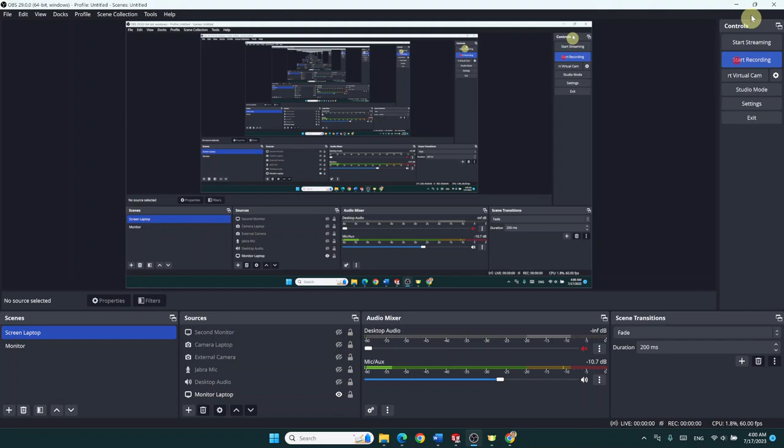So we did one part. Now we want to make the assembly. We don't really need the assembly for the free body diagram, it's just to look nice. So I will show you how to do it.

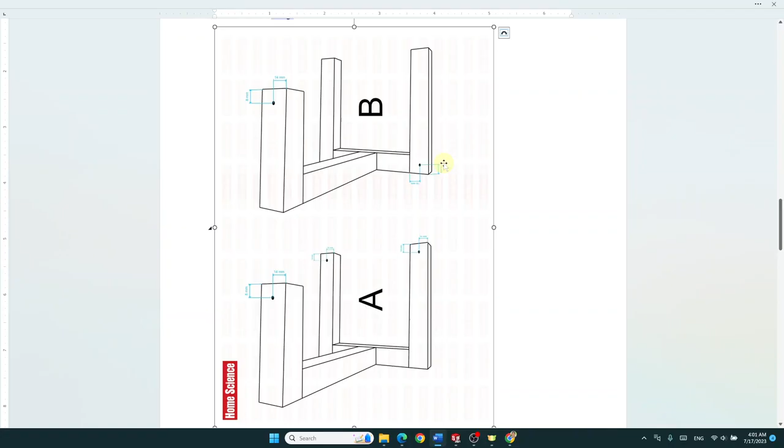Note that the two parts are almost the same. If we go back, that's part B on the top and part A on the bottom. How do I know? The bottom one has the hole near the main post. You see the holes are there, and on the top part the holes are completely at the end of the U shape. So this is the top part and this is the bottom part. The hole on the smaller part that's going in the middle.

That's at 14 and 8 millimeters, both of them. So let's do this hole first, and after that I will save the two parts with two different names and make the two holes. So we have dimensions for the hole. I will make a little hole, let's say a diameter of 2 millimeters. And we have 8 millimeters and 14 millimeters.

So I will use an equation for that. The 14 is easy, it's just the middle, so let's just use the middle for that. This 14 is the middle, and I will just use a distance for the 8 millimeters and the diameter.

So let's go back on Solidworks. Tools, equations. I will use the diameter of the holes, say 2 millimeters, and the distance... I don't need any comment there. This one is distance hole, 8 millimeters from the very end.

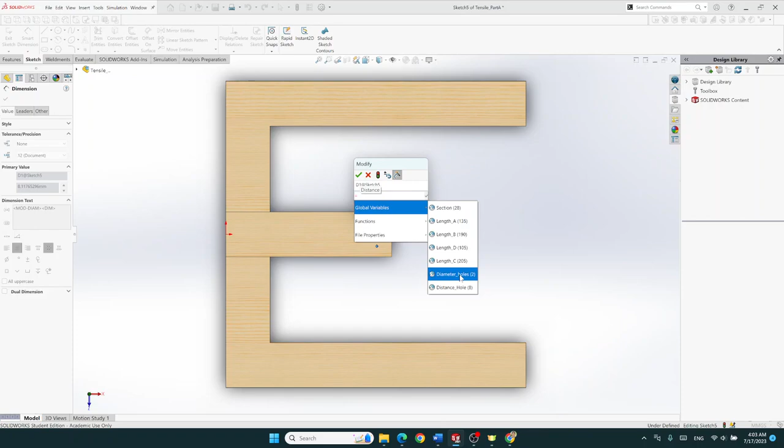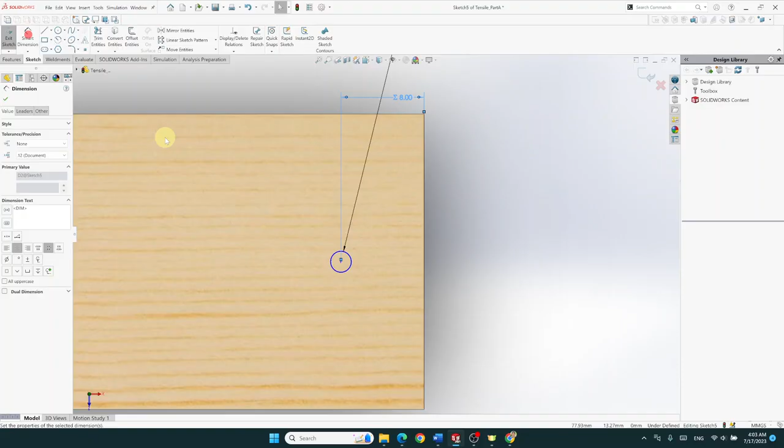There we go. I will use diameter equal diameter of the hole, and I need to add the distance between the center and the side. To zoom in and zoom out, I scroll with my mouse. Equal distance hole, enter. Let me unmark the dimensions. Why can I still move it? I can move up and down, so I need to put the middle one.

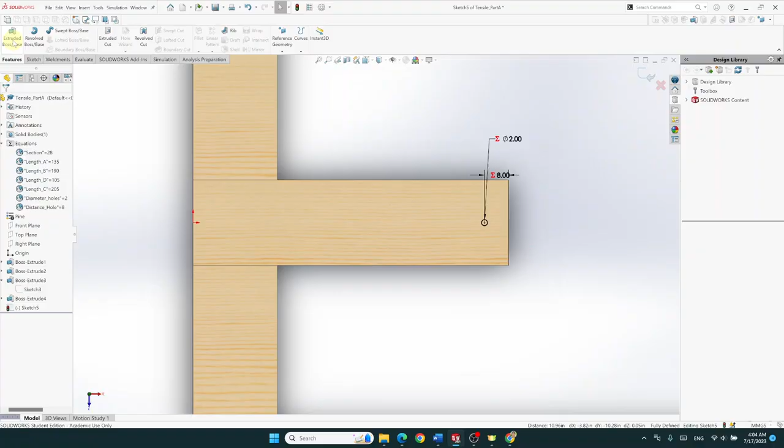So I click on the center of the hole, and let's do this one. Let's see, I can make it horizontal. Here we go, so it's at the center. And for features, instead of extrusions, I will do an extruded cut, and I can make it through all, so that will make a hole all the way through the part.

Here we go. So this is the little part, and now I will save it. So it's saved as Tensile part A, and I will do File, Save As, and call it B. So now I will have two parts, part B and part A. I can check, I have both of them in my folder. Part B is the part with the hole on the bottom.

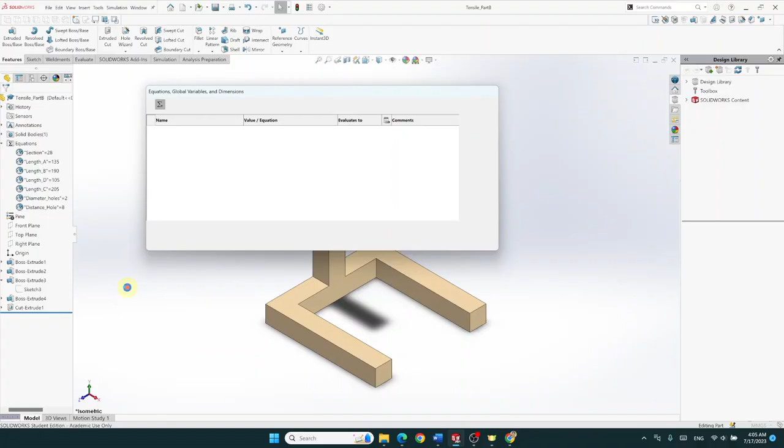If you look there, they are 14, 14 from both sides. Oh, I will need a 14 for this distance. So I will add that in Solidworks. Tools, equations. I will call that distance bottom holes, and this is 14. Here we go.

Okay, and now I click the leg there, sketch, make a hole. I can do two, there's a different way to do that. I can make a symmetry, that doesn't matter. I will add the diameter. If I want, I can just select this one, control this one, and say they are equal, and they will be 2 millimeters right away.

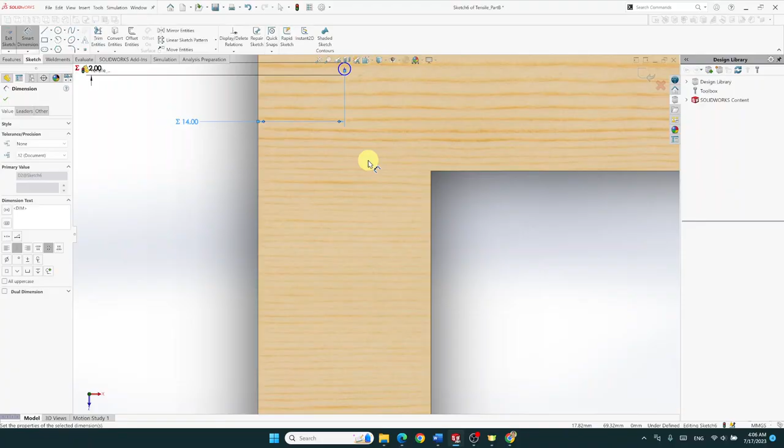Okay, now I need to do this distance, that is my 14. Last distance, like this, this one 14 too. Oh, I think that's maybe a line. Yeah, we have the 14 from the side. Let's do that.

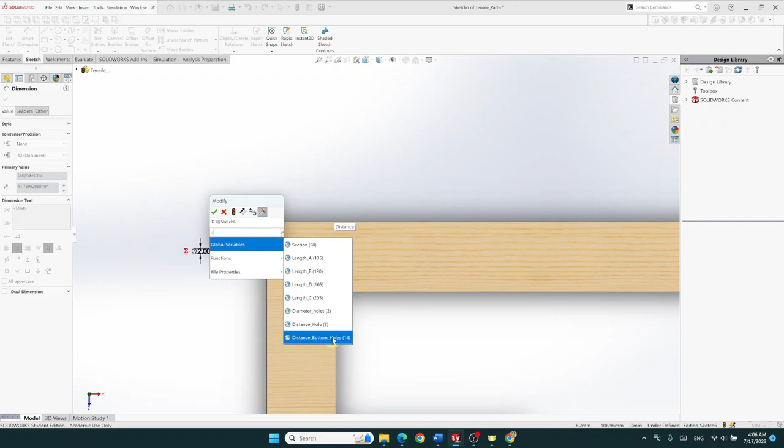Here we go, this one is correct. And this one, let's check how I can move it. I can move it. Okay, I can move it in all directions. So I need to add the 14 on both sides.

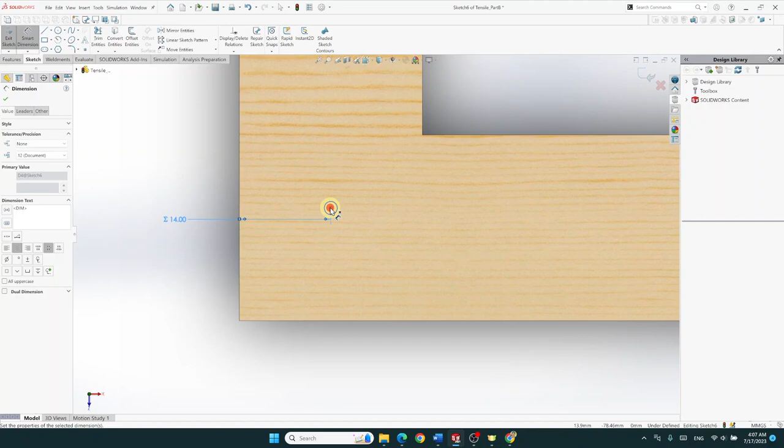Here we go. Features, extrude cut, and I will click through all, and okay. So this is my bottom part.

Let's click save, and let's open the A. That is the top part. So it looks the same except the little hole.

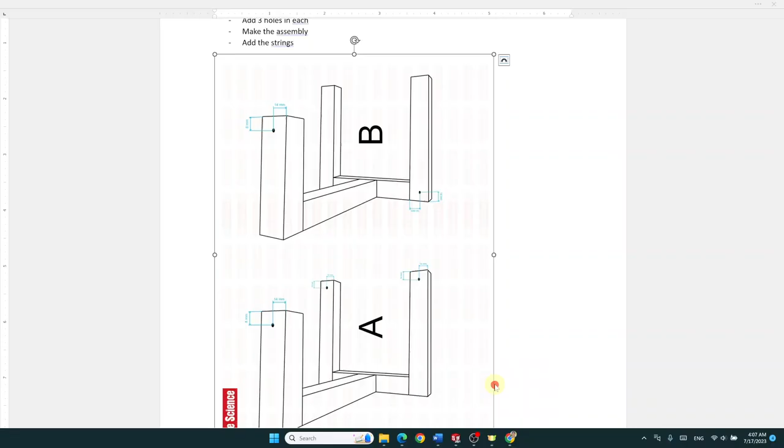And if we come back on that, the top part is 14.14, but from the side. I need to add the 14 because I don't have it on this one. This one is top holes because it's on the top for this part.

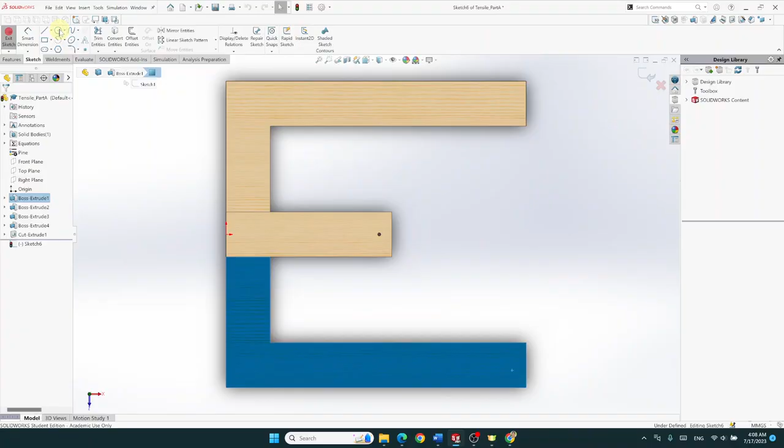Here we go. Yeah, the part will be flipped over. So let me draw the circles on this one. Let's see if I can keep.

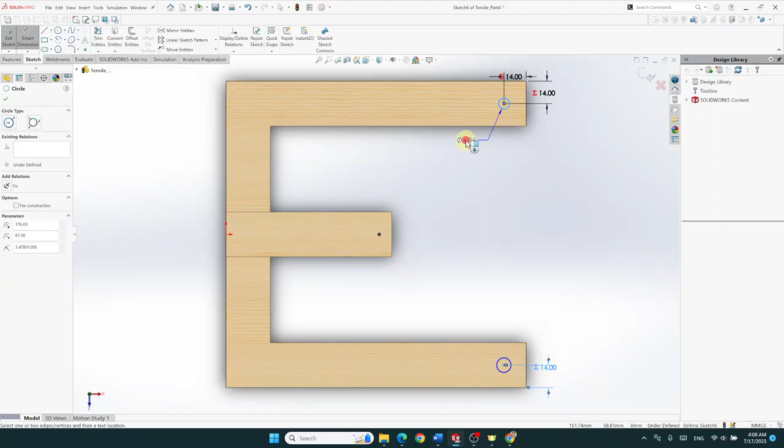Oops, the 14 from the side. I thought I would add the diameter, but let me do this first. Okay, diameter, a small diameter. Oops.

Let's put the diameter also. I can say they are the same, that doesn't matter. Okay, so this one is still blue, so I will add this distance. Even if I put them vertical, it doesn't keep the relation.

Okay, oops, the diameter. Oh, I need to break it. I think delete. How do I delete that? Okay, I think I need to delete and put it back.

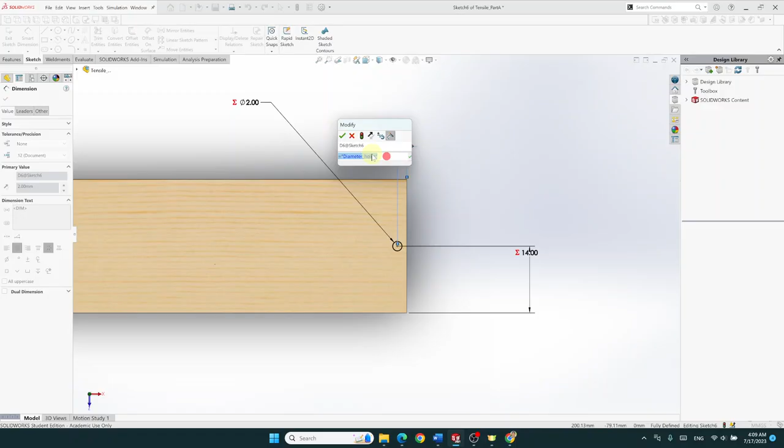I put diameter instead of distance. So I delete it and click again. Oh, no. I'm going too fast. This one. Here we go. I'll remove that.

Features, extrude, and through all. There we go. And save.

Okay. Now I will start to do the assembly. So I will do File, and I will just do one thing that will make it a little bit easier. Let's go back first on the other part. Where's my other part? My other part is there. I am on the Tensile part B. Why? Because this one is the one that is on the bottom. So I want to insert this one first, so that will be the one that is in the right direction.

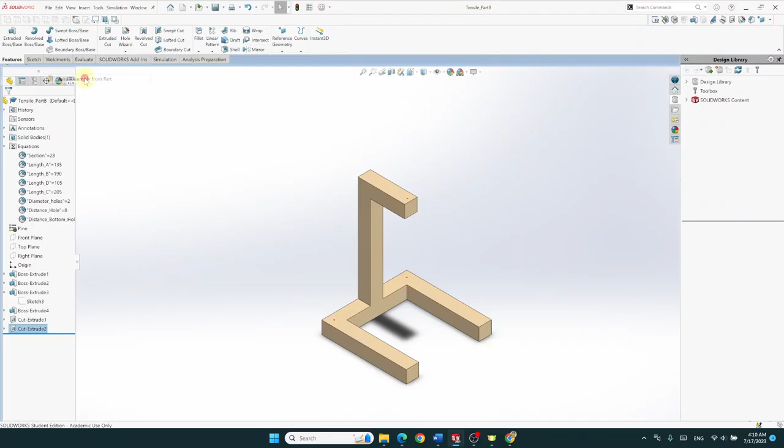So I am on the Tensile part B, and I will do File, make an assembly from this part. Okay, and I want to have the Tensile part B first. Oh, that you see that will not change anything. And yeah, there.

And if you click just there, your parts will be fixed with the same referential. That's the assembly and your part. So it's super important. You see the little F there, it means that this part is fixed, so I cannot move it at all. Okay.

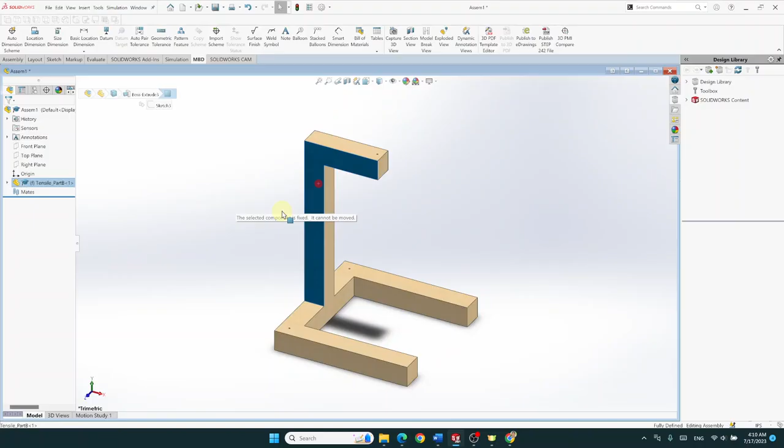And now I will do 5, no, not 5, sorry. Assembly, insert component, and I will click on the part A. And before you insert it, you can click on the axis. Let me remember how you change that.

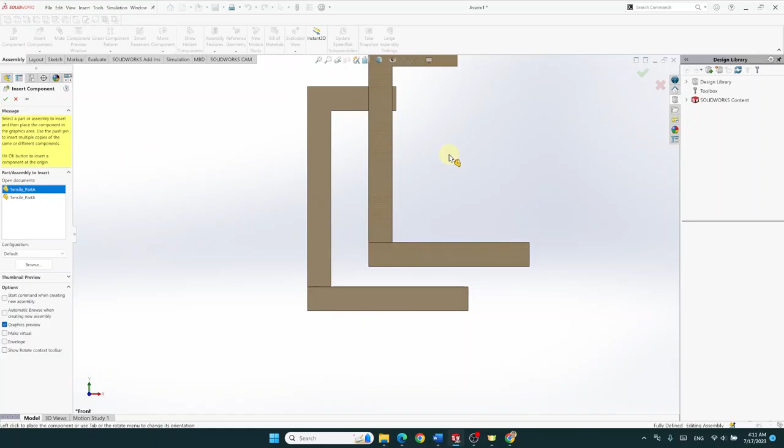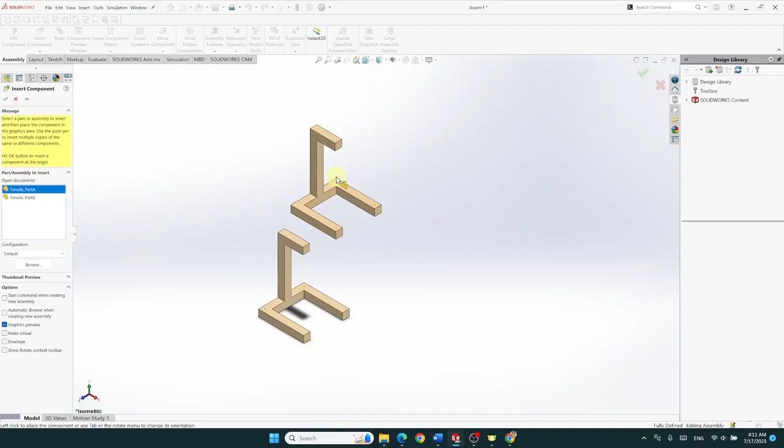I can tilt it. I don't remember how. No, let's just click there. Okay, that's okay. I thought I can tilt it first, but I don't see the option right now. So let me move it there.

Okay, and this one I can move it all the way as I want. Okay, so I will first switch its direction. So I will select the bottom of this surface and the top of this surface, and I will click add a mate, and you will see what I will do. I will do coincident, but I will change the alignment. Let me see.

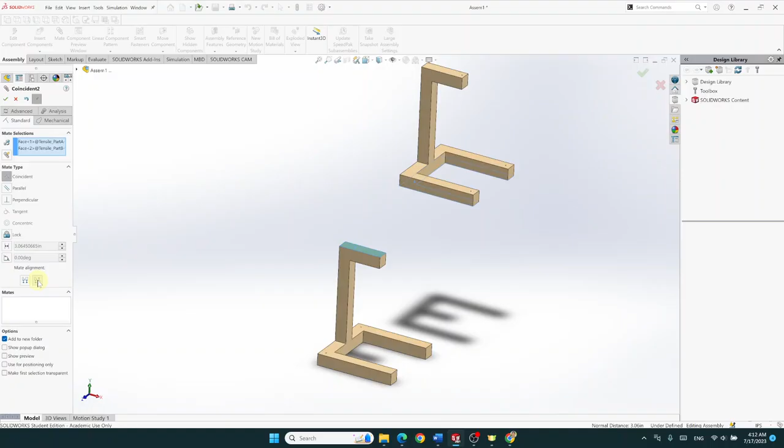Let me not do that. If I do coincident, I wonder if it's my computer that is not switching. It should be. Okay, let's escape.

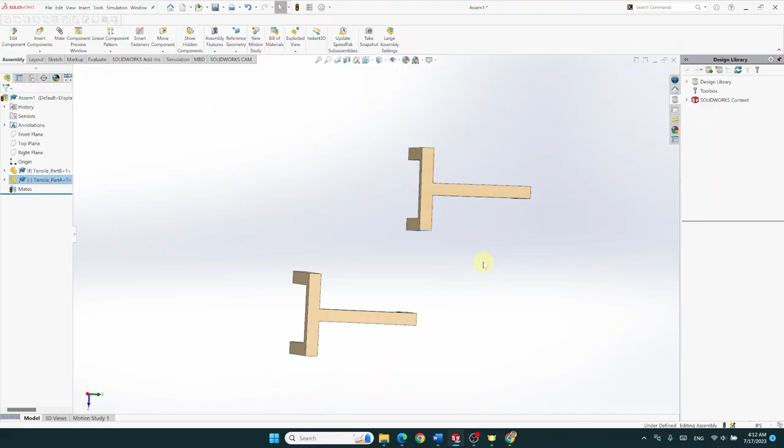Okay, let me try again. Click on the mate. If I do those two. Oh, well, it doesn't tilt. Okay, let me pause and come back.

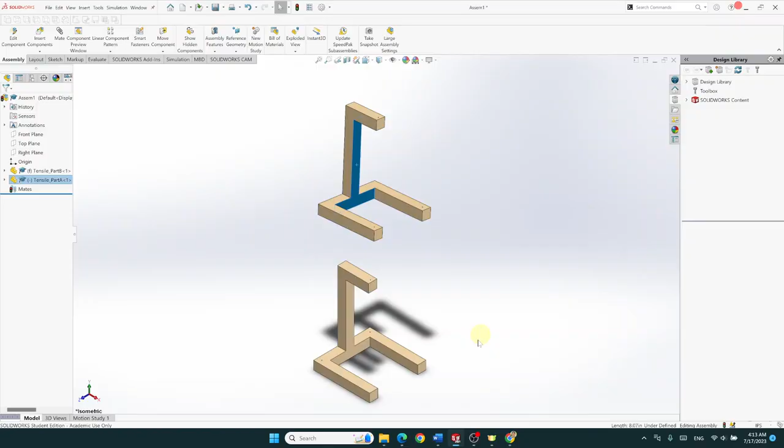Okay, so I click on any place on there and I click on my mouse on the middle and on the right. Okay, I was able to do it just before, but so this one will turn on that axis. Okay, let me try again.

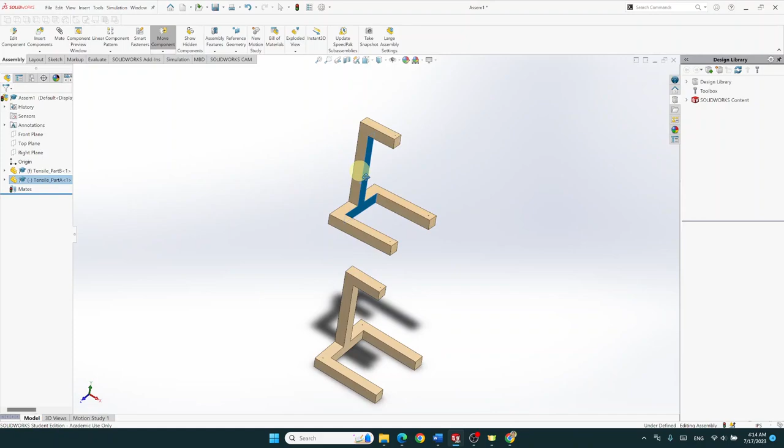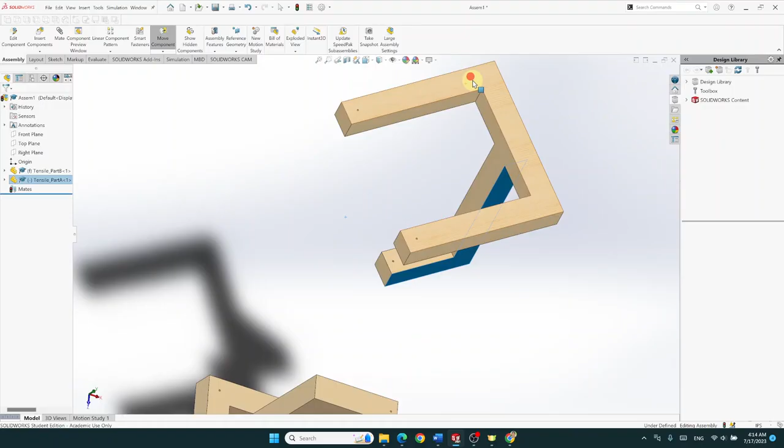I'll try to switch my... okay, so you see I kind of rotate my part. I need to rotate it more. Okay, here we go, it's the one that is not easy. So I click on the mouse on the middle, and on the right. Here we go. I put it more in that direction, and now I can look at the distances.

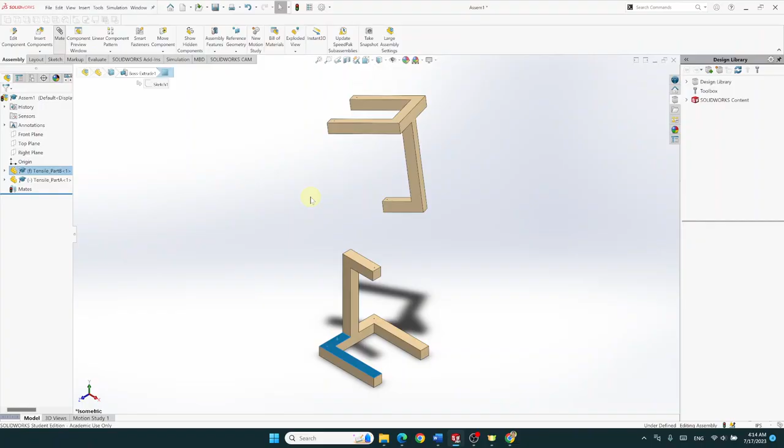So if I look at the distance from the top of this one to the bottom of this one, I have 315. So let's put 315. The distance between this one, mate, and this one on the top, that should be a distance of 315. Let's write millimeters there because I forgot. And let's click enter.

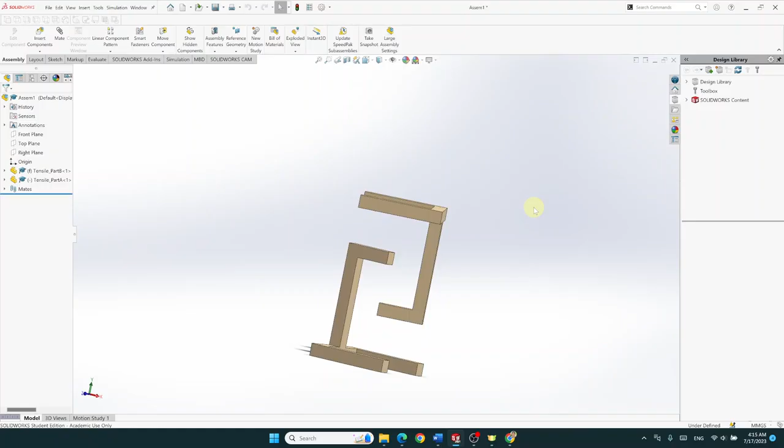Okay, here we go. I forgot to do something there. Just click on there and click also millimeter, so the distance will be in millimeter. So now I have the 315 between this one, and if you click on mates, there we can see this distance, that's the 315. Another distance that we need is this 92, that should be there. We should not have to do anything with that, because if it's 315, that should be 92. We can check after.

Let's now put in the center. So what I like to do is I like to put the planes together, meaning this top front plane should be the same as this. I can click on there.

So I am on the Tensile parts. Let me check. Oh my god, it's not easy. I am on the part A, so I need to be on the part B, the front plane too. I think my computer just has a little bit too much.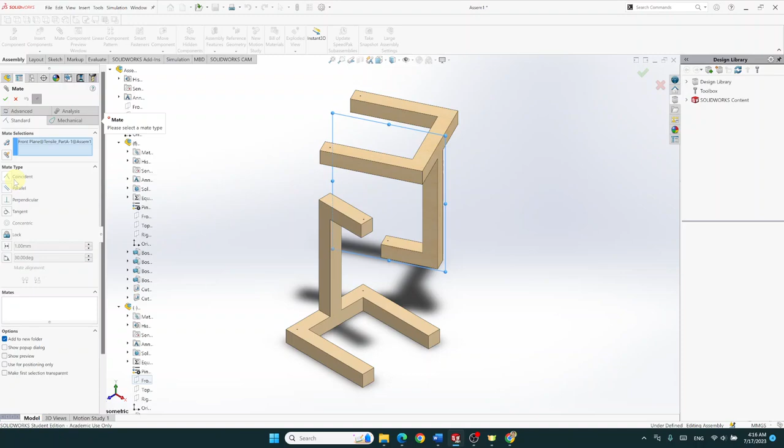See what I try to do? I try to make the two front planes together, and that will be perfect. I have this one, so now I want this one. Okay, please select a mate. Coincident, okay, here we go, with the front plane.

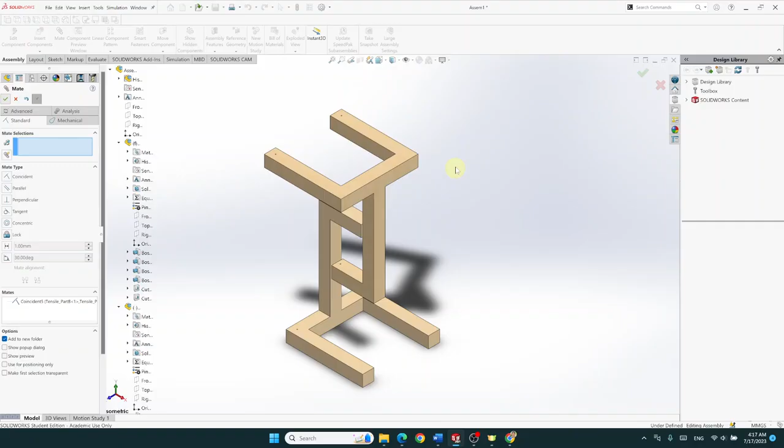Okay, here we go, and I want them this way. Let's check if I do this. Yeah, here we go, perfect. So now we are there. Now we just need to say how far away it is from there. And if we look on the side, we are super good. So it should be... I think exactly on top of it.

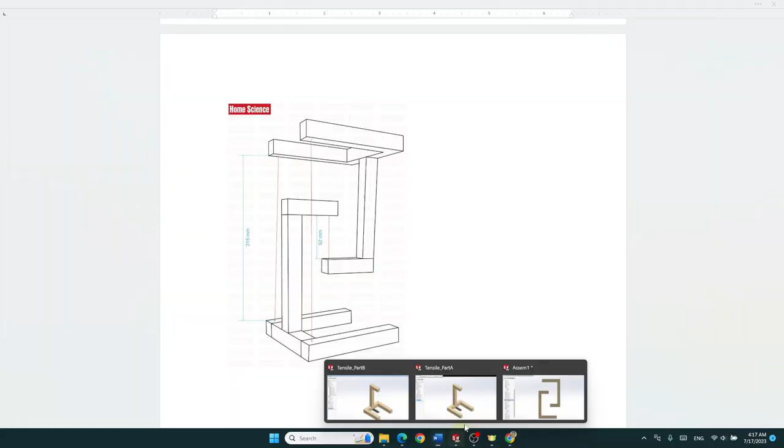So that's 14, that was 14 and 8 and 8. So because it's 14 and 14, that's the same distance. So, oops, there. What we can say is that this one and this one mate, and they are coincident. And I click enter and enter again. Here we go.

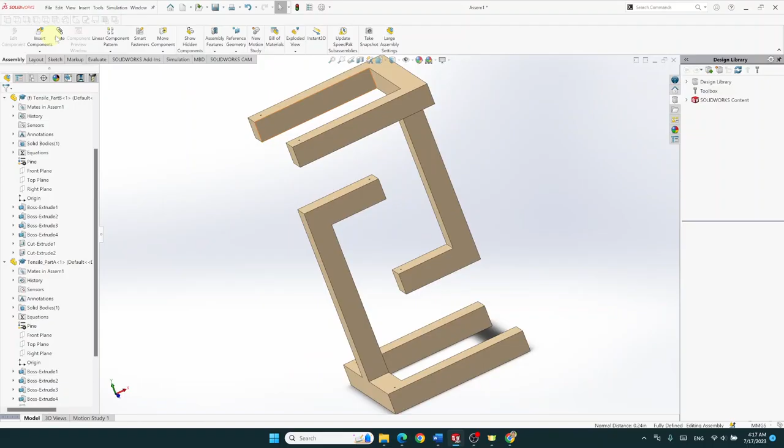So now that's like this. And we can check the distance between the two. Let's check the distance if we have the 92. For that, you click evaluate and measure. And you want to measure between this one and this surface. Okay, let me select the two options.

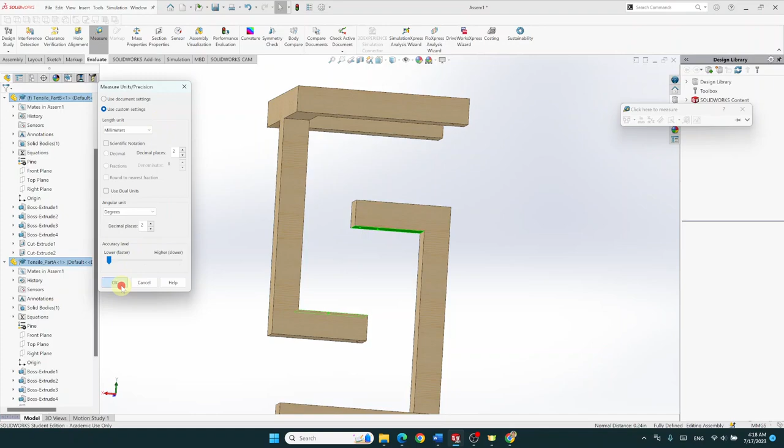This is in inches. Let me see. Okay, oops, use millimeters with 2 decimals. Okay, but I don't know why, like just 2. I can take on this one. Okay, we have the distance, about the distance.

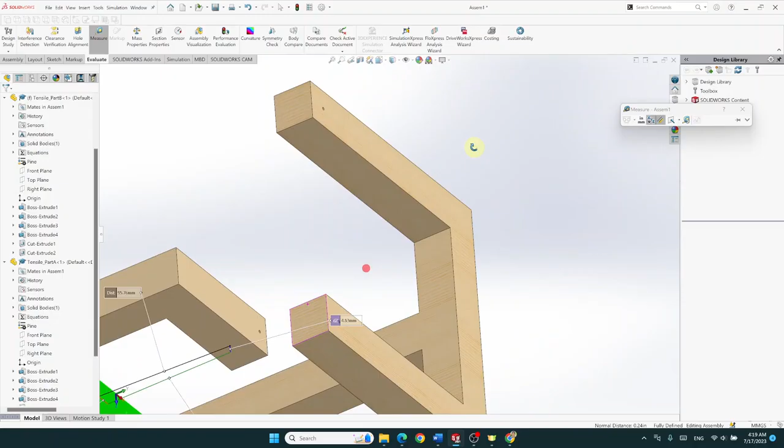95, so it's a little bit at an angle, but okay, 95, the direct distance, and on the drawing that will be 92. Wonder if they are correct. Should be, but let's see if we have the correct distance from this one to the one on the top. This one, the direct distance is 205.

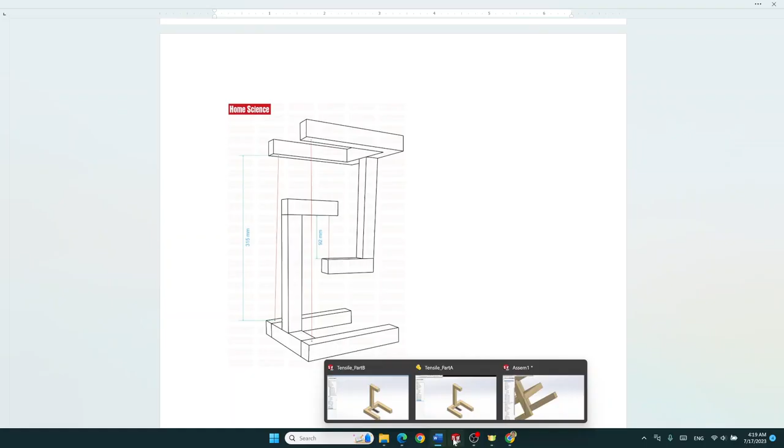205. Oh, why do we have 315? Okay, we need to check that. Okay, let's see, I know it's not easy. Oh, okay, now let me. Before it was never adding all the distances this way. So now let's see this one.

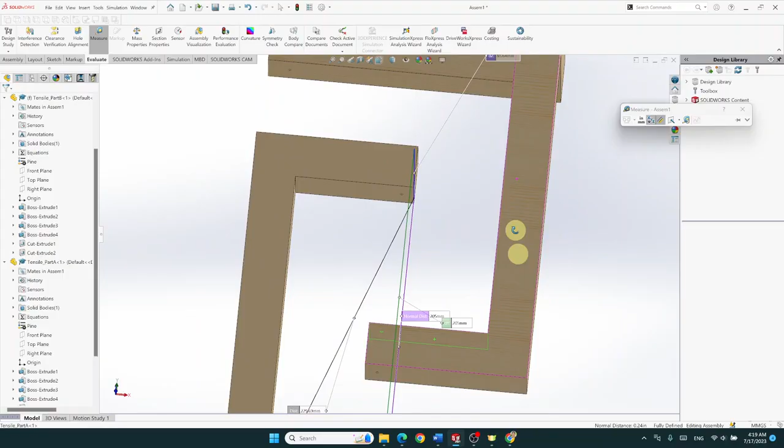Let's do clear, okay, here we go. Measure this one to the one on the bottom. Here we go, to this one. Oh, it changed from one part to another part. I don't want this one. Okay, that's okay, I will... this one.

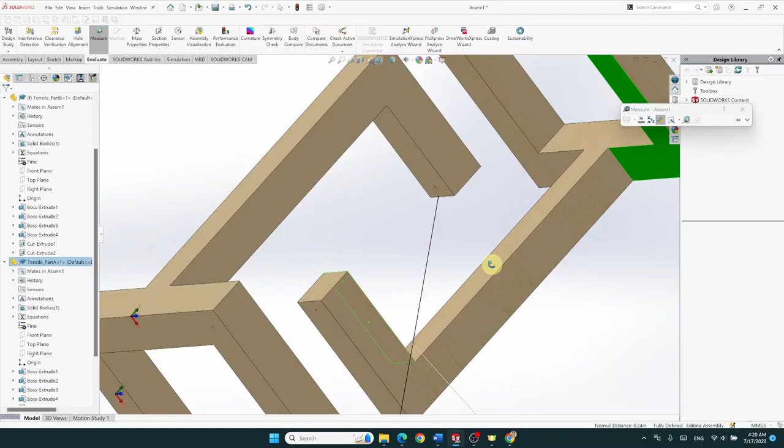Okay, anyway, forget about those two distances. You have this, this is pretty good, that shows you a distance. Let's say we want to add some little parts, one little last step just to show what it looks like. You will check all your distances and all of that. But you can do...

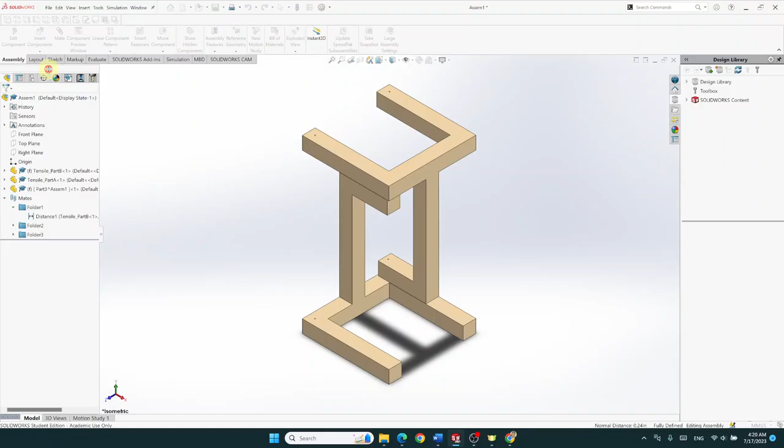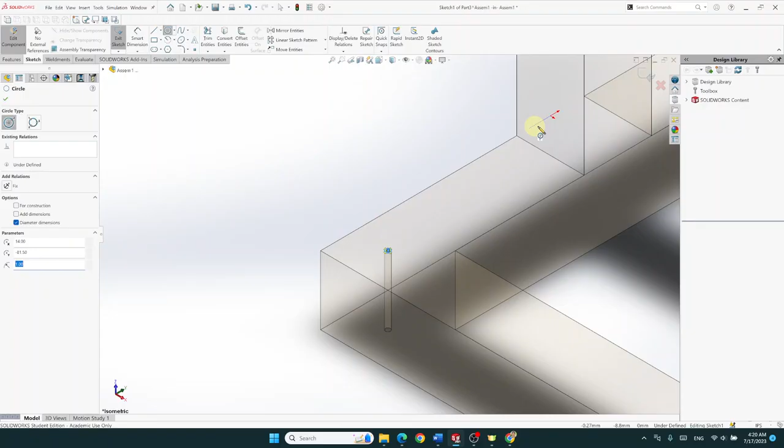Insert a component and a new part. And we can draw a part from there. And we can do the sketch. We can do the little there. We can even use that if we want. Yes, we have this one. That's perfect. And we can do another one on that side. Oops.

That's where it's a little bit challenging to move, and that's your computer handling all of that, at least on mine.

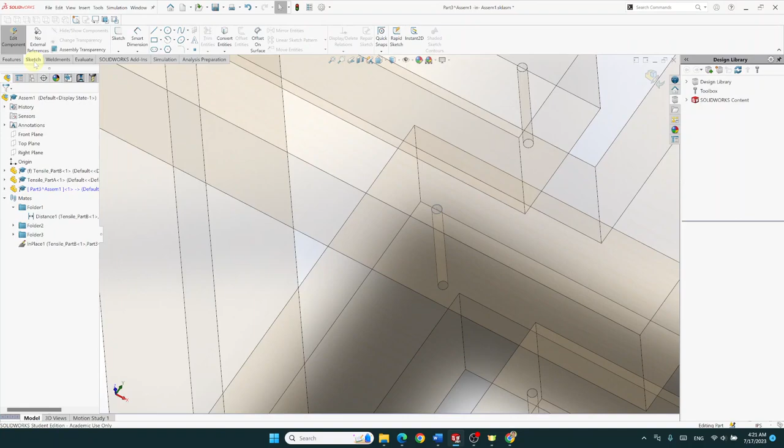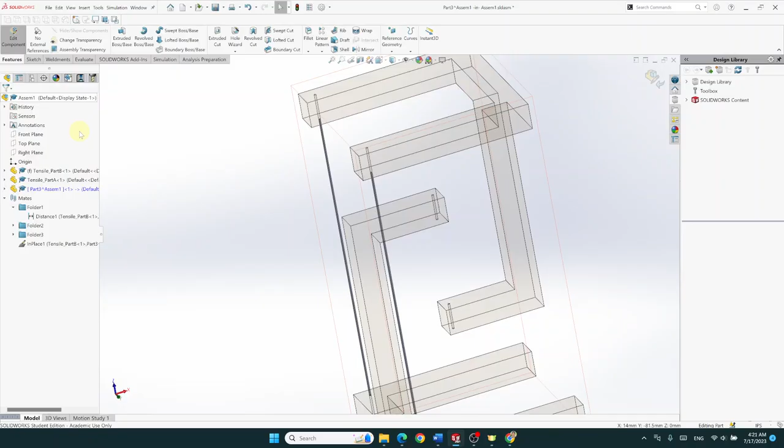Here we go. Exit sketch, and we'll do features, extrude. We want to extrude this one, and we want to go up to the surface. It's going up, and we want to do it up to the surface there. That's very interesting because it's up to the surface of another part, but SolidWorks can handle that.

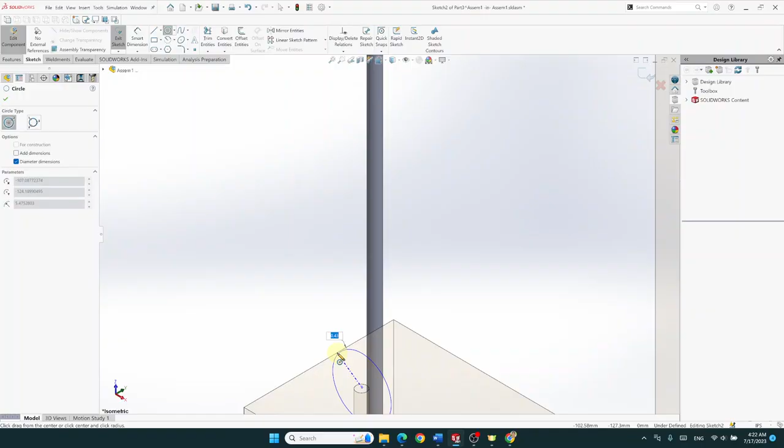So we have this string done, and we can add right away another one. Sketch. We can completely cheat and do everything from this plane, and we'll do it there. Oh, I'm not in the right plane, sorry, that's me. Hit sketch, so I'll do again a sketch on this one. Well, I was not on the right one.

And I'll do the little circle. That's the one that is at 8. So this is this one. Up. Here we go. And features, extrude.

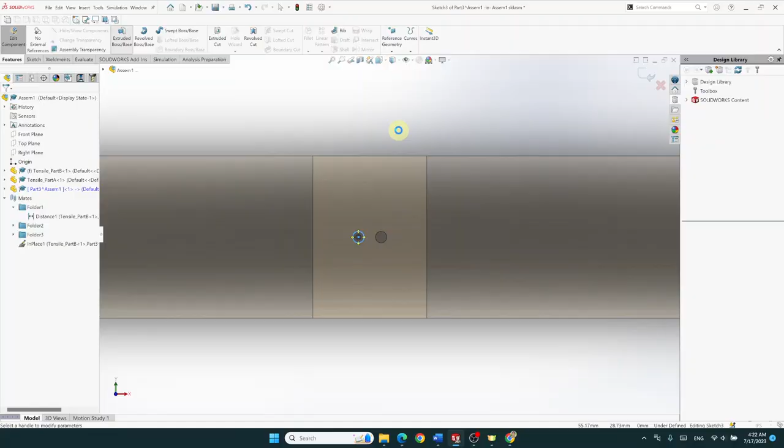And we will get up to the surface on the top. So this is this one. So we can select that one. Up to the surface, this one. It is supposed to.

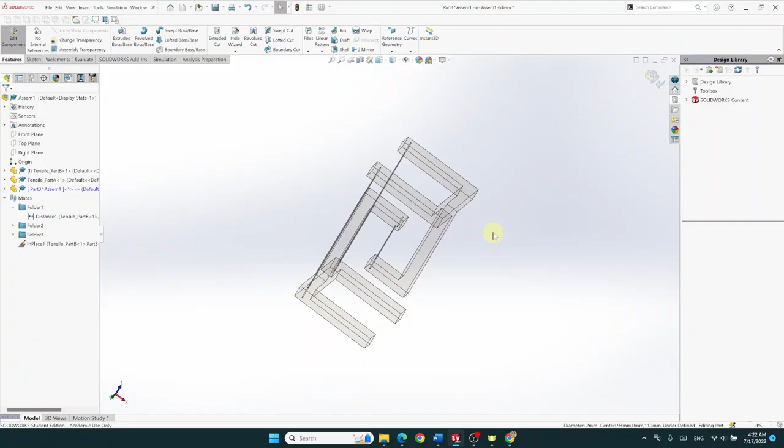So they don't have... you see there, they made a little mistake on the dimension. That should not be 8, it should be maybe a little bit more. Let's try. So let's keep it this way.

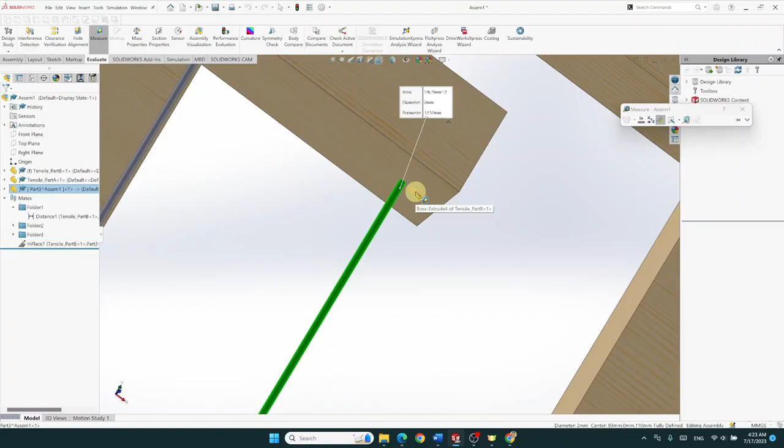I take it outside, so let me see what is the distance between the two. Oops. Can I measure? Diameter is 2. Well, you have the X, Y, and Z. So on the X, 4. So let's say there is a 4 millimeter distance. So I need to change the distance of the hole by 2 millimeters.

So instead of 8, it should be 10. Let's try this, you see what I mean? So on... okay, let's save. Let's save this part. Save all, let's save my assembly.

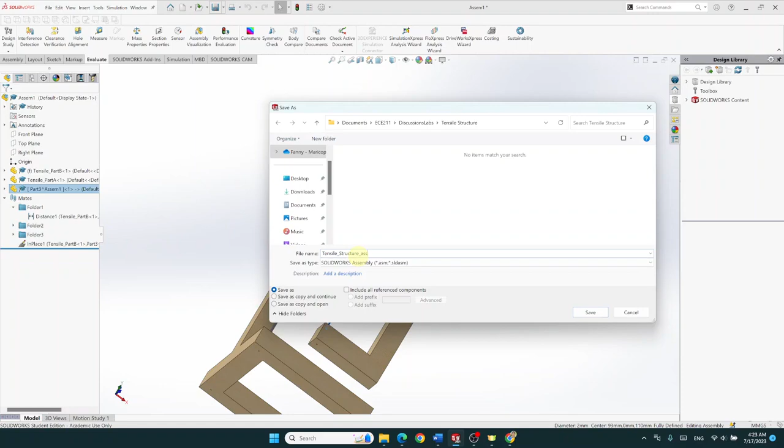This one is the assembly. Save with the reference, save all. And we will have to save the little string part. Oh, that's correct, this part was saved inside. So that's the little string. Now we can... where is my other parts?

Tensile B. That's where it gets super easy. This little distance hole, let's change it for 10.

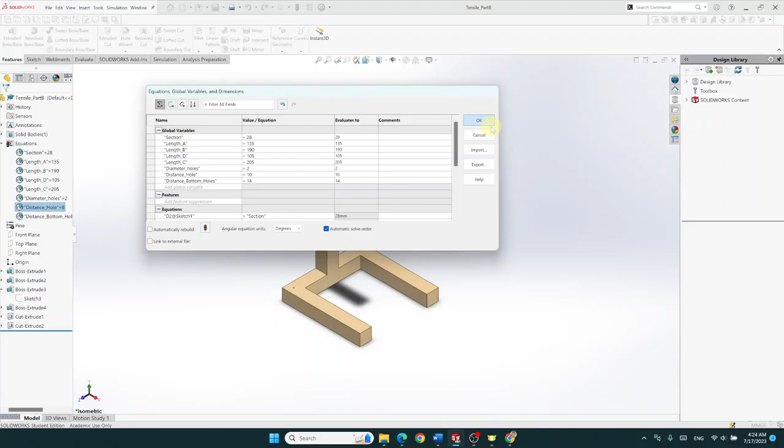Okay, let's change the location of this one. We can close this one and save. We hope to not have to change anything for part B. Now let's go on part A. That was a 4 millimeter distance. So if we change 4 and 4, tool, equations,

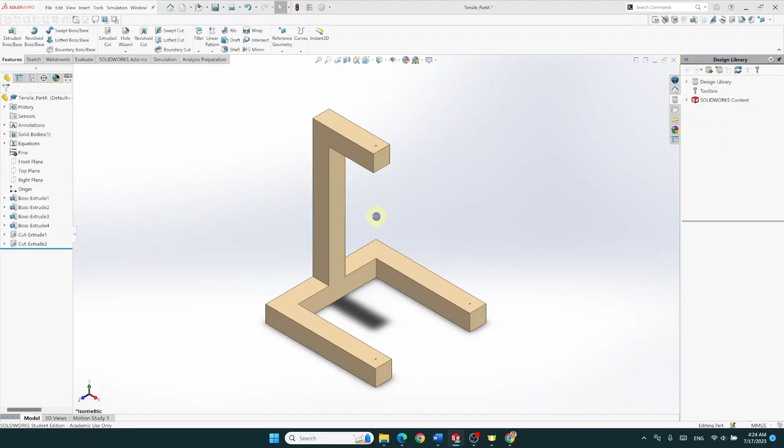10. Okay. Let's close, save. Would you like to rebuild the assembly? Yes.

Yeah, now it looks like it's right in front of it, and there's one there too. So okay, so on their drawing it should be 10, not 8. Okay, sorry, I did it before, so I did it live with you, so I didn't check that first.

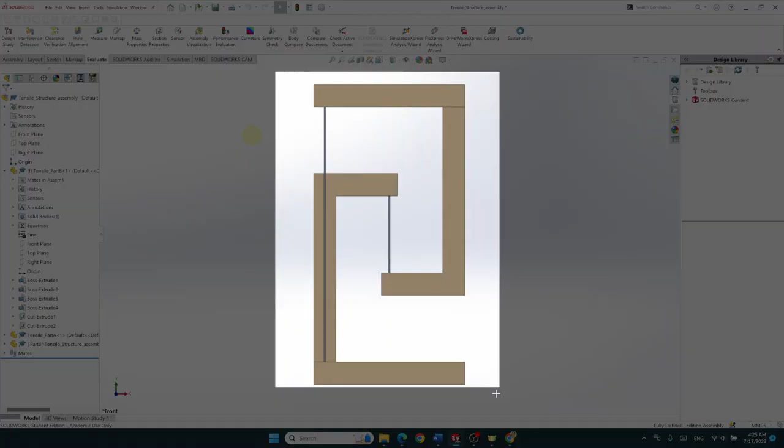So this is your tensile structure. I think it's super nice. I recommend that you take a screenshot of this one. Let me show you like this. Take a screenshot, include it in your report, and you show me where is the weight. Is it there? Is it there?

You show me the tension from the rope. This one will go up because the rope is up. This one will be down because the rope is down. Remember, the rope can only pull.

And show me the weight, and show me some equations of moment, calling this point A, the weight at G, this point at B, any other point maybe at C. Show me the different equations of moment and how they could balance each other.

What happens if G, the center of gravity, is on that side? What happens if G is on that side? Will that work or not? Okay, so I'll let you work on that.